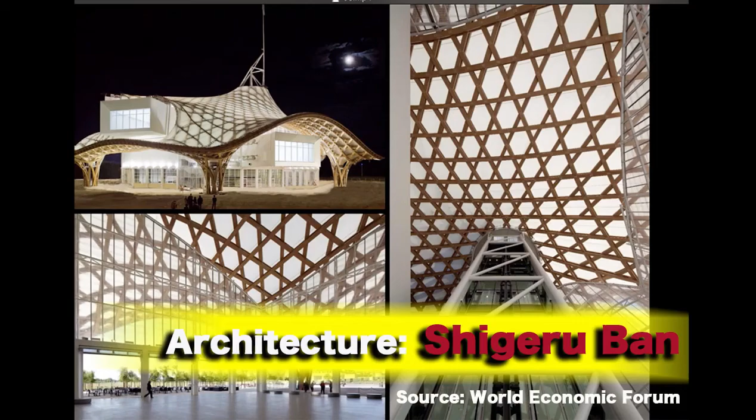It's really my pleasure and privilege to speak here and also receiving the Crystal Award last night. I was recognized not only as a normal architect, but also because I spent a lot of time doing, as introduced, disaster relief projects.

Because I was quite disappointed about my own profession as architects, because we are mainly working for privileged people. Money and power is invisible. People hire architects to visualize their power and money by huge monumental buildings. I have no objection because I love to make a monument too.

But also I thought that we should use our experience and knowledge not only for the privileged, but also the normal public, and also people who lost their houses by natural disasters. I think that we can make even temporary housing better, more comfortable, more beautiful. That's what I'm doing. And I'm trying to make a balance of working in disasters and working on some monumental projects.

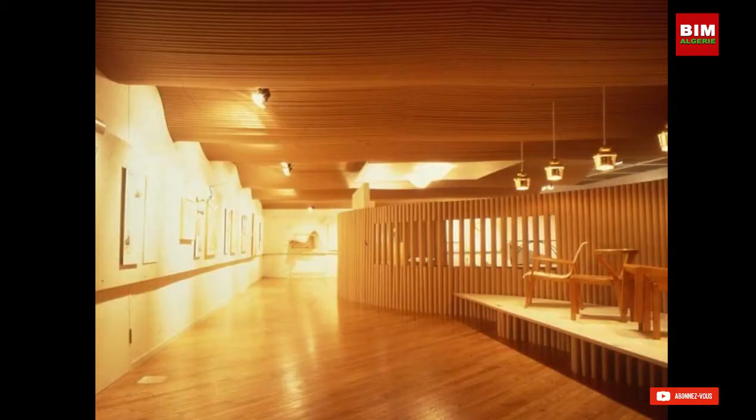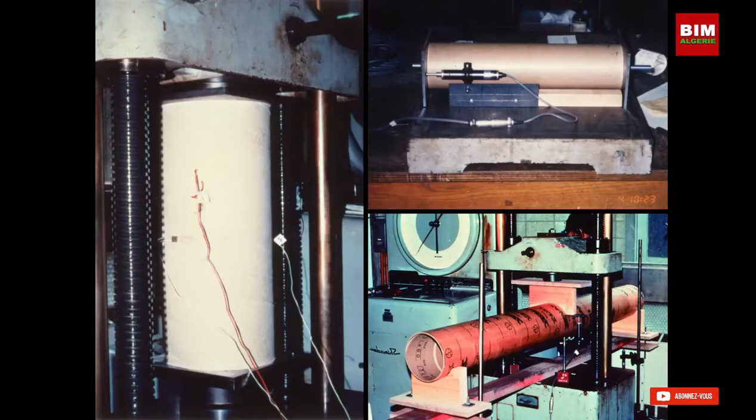This is the first project I did with the paper tube, recycled paper, 1986. Immediately after I graduated from school in New York, Cooper Union, I started my own practice without any experience as an architect. This is an exhibition for Alvar Aalto. First time I used the recycled paper because I couldn't afford using timber. In order to use it for the structure, I started testing this material. Then I designed some temporary structures.

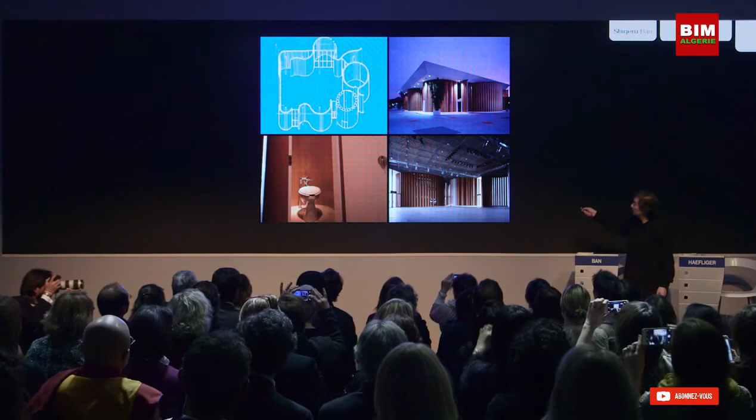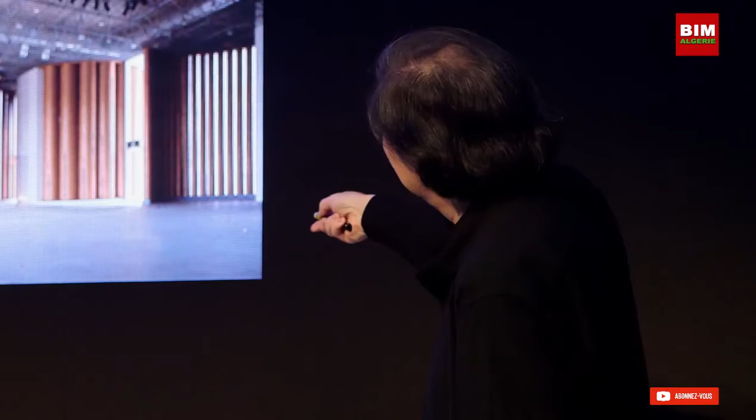This is 1990. Before people started talking about recycling, ecology, and sustainability, I started because I didn't want to waste the material. This is an exhibition for half a year. And all the building wall is made of paper tube. The diameter is 55, inside is empty, 8 meters long. Wall thickness is only 15 millimeters. There are some bigger tubes here. Diameter is 120. Inside is a toilet. In case you finish the toilet paper, you can tear it from inside the wall.

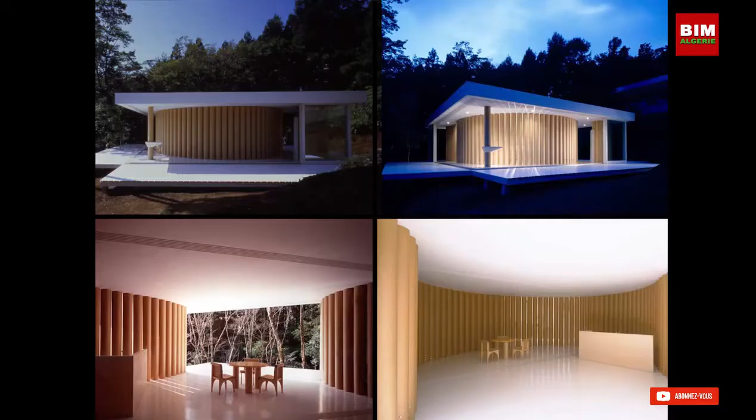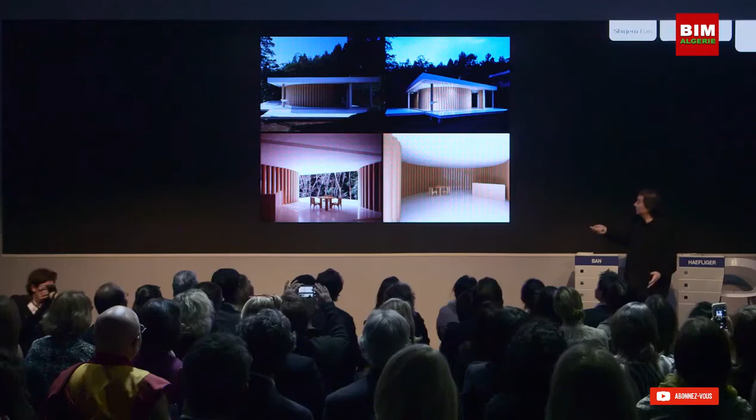And then I needed to get permanent building permission from the government. So I tested, spent a year to design my own weekend house. Although I'm not the type of person to enjoy weekends, no one hired me to design a building out of paper, so I had to do it by myself. It's the first permanent building with paper tubes with government permission. This was built over 25 years ago, but the room is still beautiful because I'm not using it. I have no weekend.

Year 2000 in Hanover, Germany, there was a World Expo. The main theme of the Expo was the environmental issue. Each country makes a lot of temporary pavilions. After half a year, we demolish them and create a lot of industrial waste. So normally the goal of design is when the building is finished. But my goal was when the building was demolished, because I wanted the material of my building to be recycled or reused after the building was demolished.

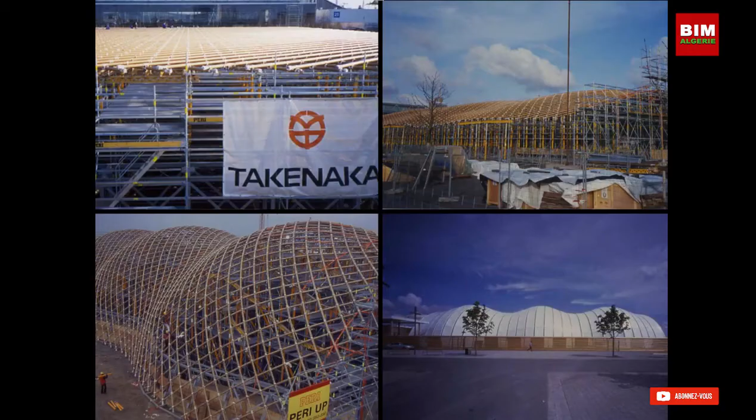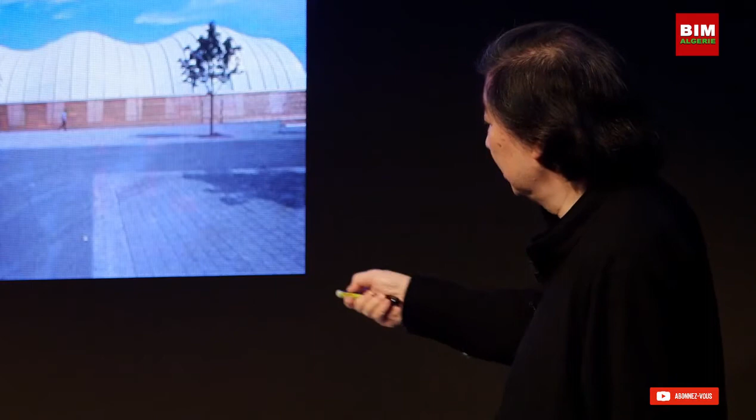So this is a paper tube produced by a German company locally, but as a part of their contract, they have to take it back after the construction is demolished, then recycle it again. That's a part of the contract we made. Even the foundation: normally we use a concrete foundation, but concrete is a rather difficult material to recycle. So I made a wooden box filled with sand instead of concrete. The connections are just fabric tape.

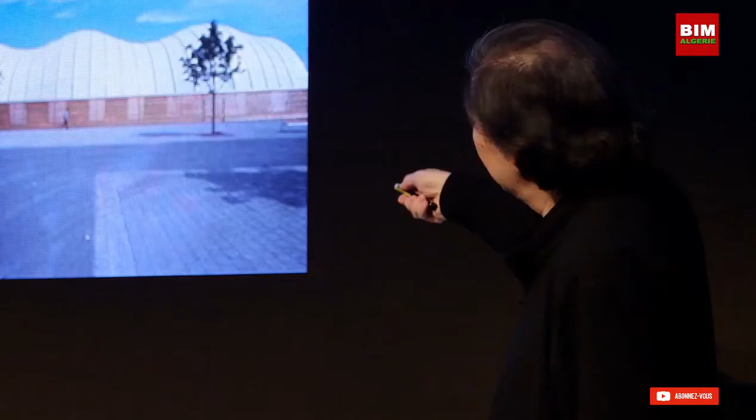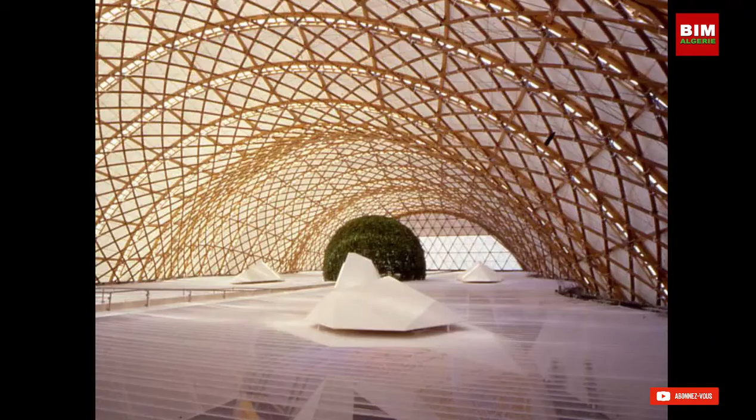Normally we use a PVC membrane, but PVC is not good for the environment. I made the roof membrane out of paper, waterproofed, fire treated according to German regulation. And this is the completion. This is a huge structure. The length is 75, the width is 35 meters. The main structure is paper tube, recycled paper.

And also I make buildings movable. This is a museum called the Nomadic Museum. This is for Canadian artist Gregory Colbert. He wanted to have his own museum over 5,000 square meters, travelling from city to city, country to country. So I decided to use shipping containers, not because shipping containers are transportable. I use shipping containers because they are an international standard. You can find the same used container anywhere in the world.

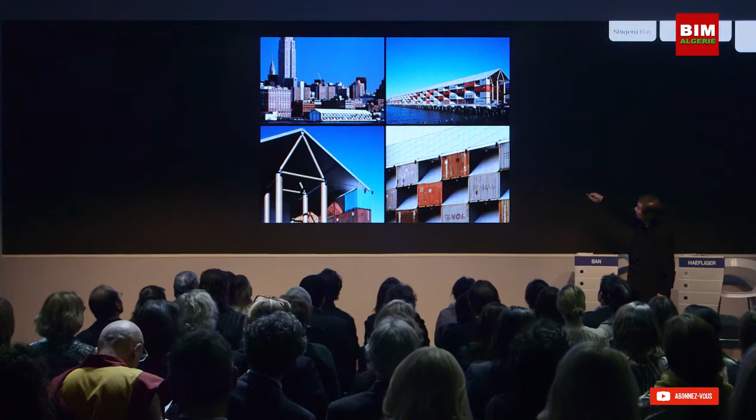So this container was just rented. This is in New York on the 14th Street Pier. We rented them for 3 months from a nearby shipyard. After the exhibition was over, we returned them to the original shipyard. Then when we moved to Los Angeles, we just rented containers from a local shipyard. This is a very old pier, with piles made of timber. Inside, paper tubes support the roof.

And this photo is one in Los Angeles, Santa Monica, because we got the parking structure. Now it's become 2 layers of 100 meters instead of 200 meters. We can even change the floor plan depending on the site conditions. As you see, the color of the containers is different from New York. This is one we rented in Los Angeles.

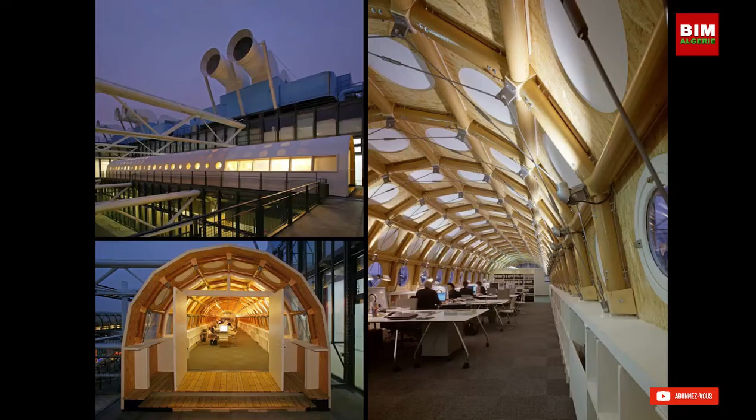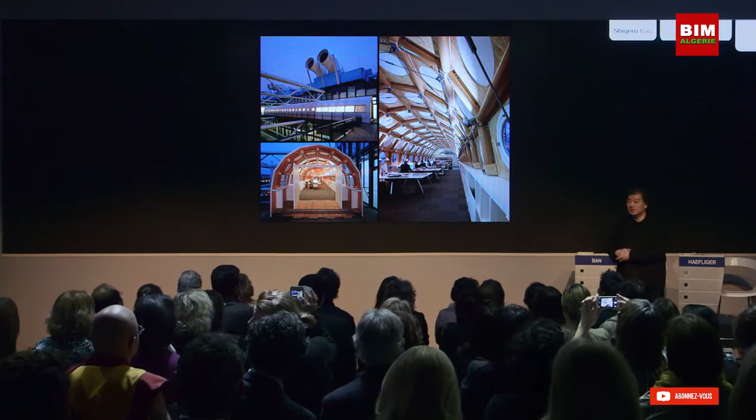This was my temporary office in Paris. When I won the competition for the new Pompidou Center in the city of Metz, I wanted to open my own office in Paris, but as you know, renting an office is very expensive in Paris. I couldn't afford it. So I asked the president of the Pompidou Center if he would lend me the terrace or a rooftop. I wanted to make my own temporary office.

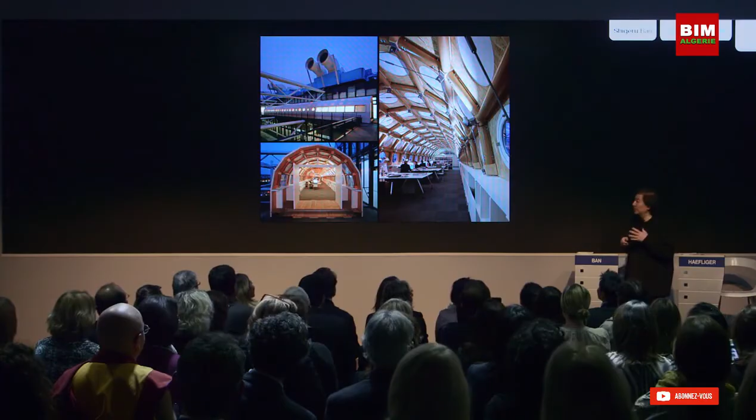So he agreed, as long as the audience of the museum can see inside my office to see what's happening in the next museum. So I was very lucky to stay there for 6 years without paying any rent, with a beautiful view. But there's one problem. When my friends came to see me, because we were part of the exhibition, they had to buy a ticket to see me. That was a real problem.

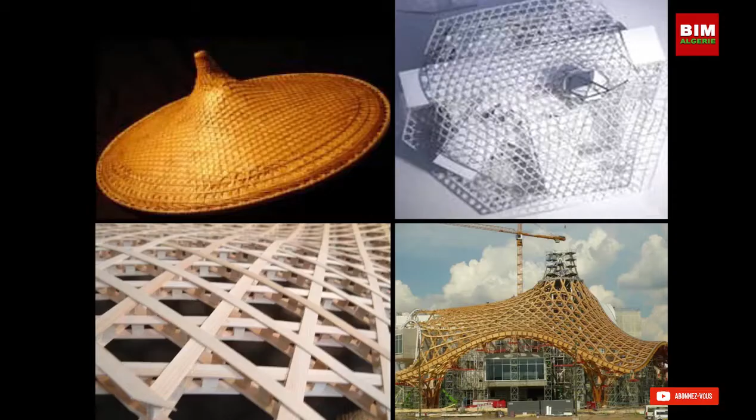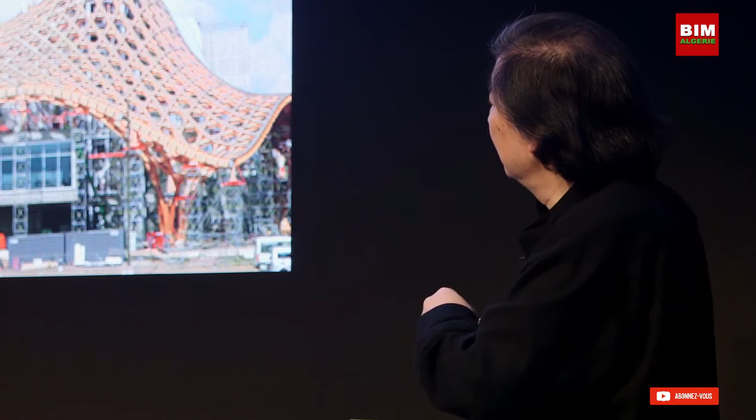And this is the construction of the new Pompidou Center in the city of Metz. The roof is made of timber structure. This is where the idea came from. This is a traditional Chinese bamboo hat. When I saw this bamboo hat, it's very architectonic. The bamboo woven, creating a hexagon pattern, and the oil paper for waterproofing, dry leaves underneath as insulation. So I wanted to make the roof like this in timber.

I made the roof hexagon shape, even each pattern is hexagon. Because if you see the map of France, the shape of the country is nearly a hexagon. So for French people, the hexagon is a national symbol. I thought in order to win the international competition, I should use the symbol of the country. But now I'm working on another project in Israel. I'm using this same pattern for a different meaning.

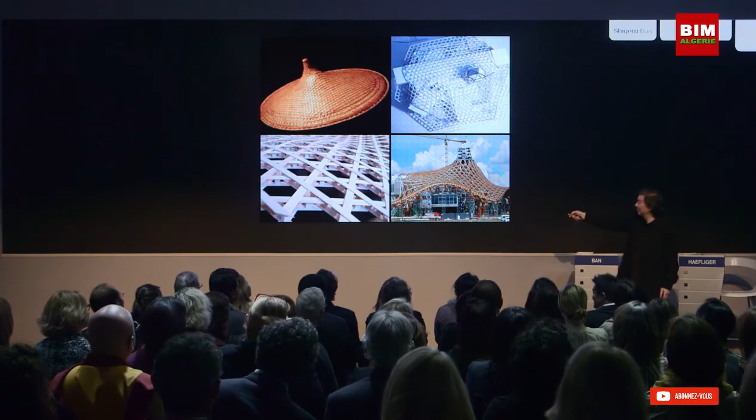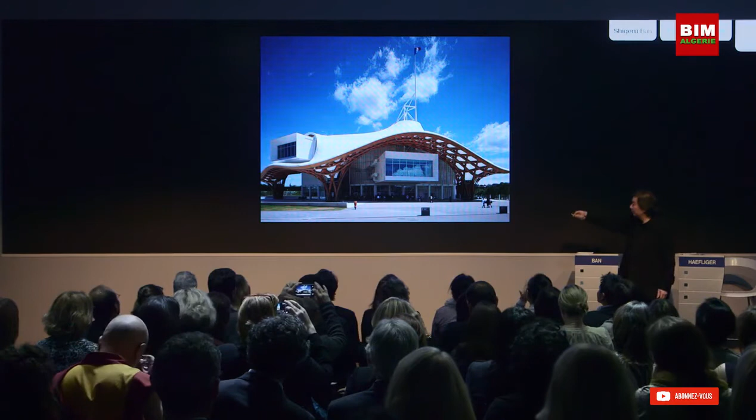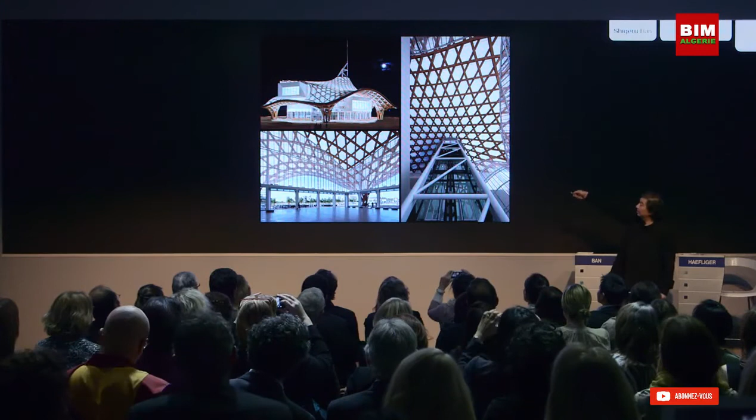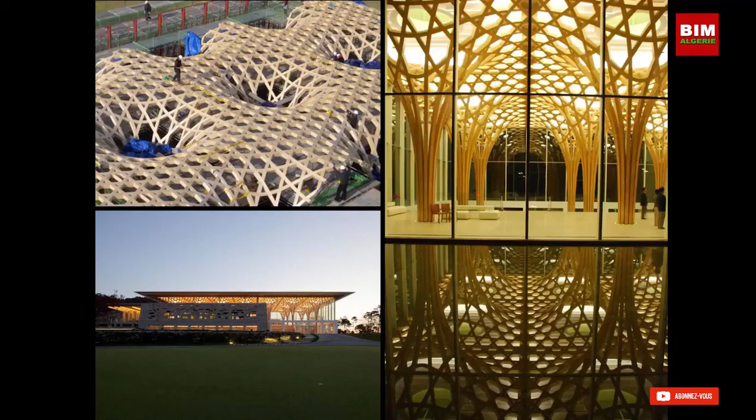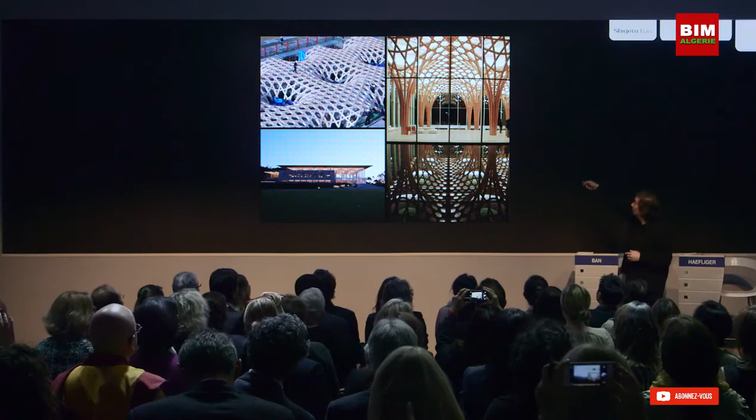I was asked to design a golf clubhouse in South Korea, but I don't play golf, so I didn't know what is inside a clubhouse. But when I was very, very small, my father used to take me to the golf range for practicing. At that time, the tee we put the ball on was made of wood. Now it's plastic. So that was my only connection to golf. So I made the tee structure in timber. So that was a very simple idea.

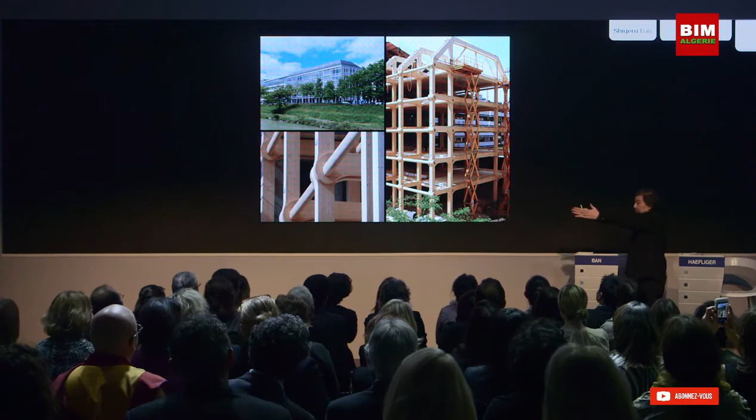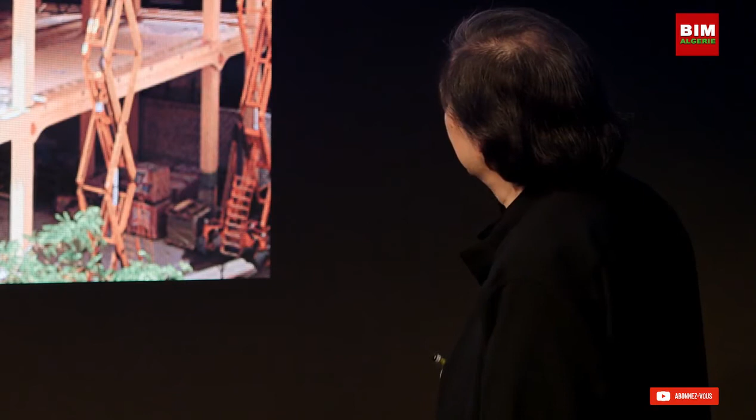This is the headquarters for Tamedia. Tamedia is a newspaper company in Zurich. And this is a 7-story timber structure in the middle of Zurich. These are the connections. I didn't want to use steel connections. I just made 2 beams on both sides of the columns, because it's oval shaped. The connection is rigid. It doesn't move under lateral force. It's a very simple construction method to make construction quicker and quieter. This is inside.

I thought we have to provide them better shelter. Otherwise, the medical care doesn't help them. So I wrote a letter to the United Nations High Commissioner for Refugees, but as usual, there's no reply. So I had to go there by myself without any appointment. And I was very lucky to meet a German architect who is responsible for shelter construction.

The United Nations started to provide them aluminum pipes, but aluminum is a very expensive material over there, so they started selling them for money and cut trees again. That's why aluminum pipe didn't work as an alternative material. So at that time I proposed to use a recycled paper tube for the structure. That is why I was hired as a consultant to develop this further.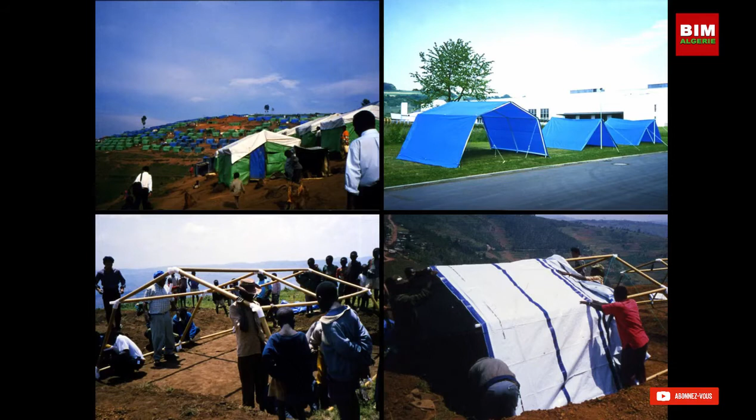This photo shows 3 different types of tent prototypes I was testing. I was very lucky to get sponsorship from one of the most famous furniture companies in Switzerland, Vitra.

A year after, 1995, in Kobe, Japan, we had this big disaster. Nearly 7,000 people were killed, and this city totally burned after the earthquake. And I knew that there were many Vietnamese former refugees gathering in this Catholic church. I thought that this minority must have a more difficult time than the normal Japanese victims. So I went there, and they were having morning service without any roof.

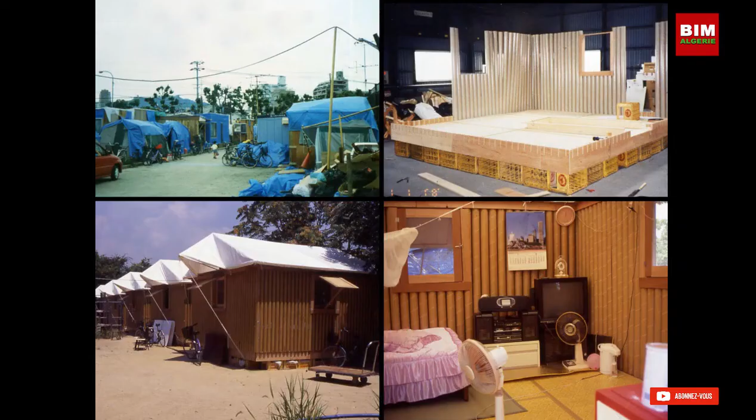So I asked the priest, why don't we rebuild the church out of paper? But he said I'm very crazy, proposing a building in paper after the fire. I didn't give up, so I commuted to Kobe. They were living in very poor conditions in the park with plastic sheets. They couldn't move into government temporary housing because the housing was built outside of the city. They are working in a particular factory, and they cannot commute from this temporary government house.

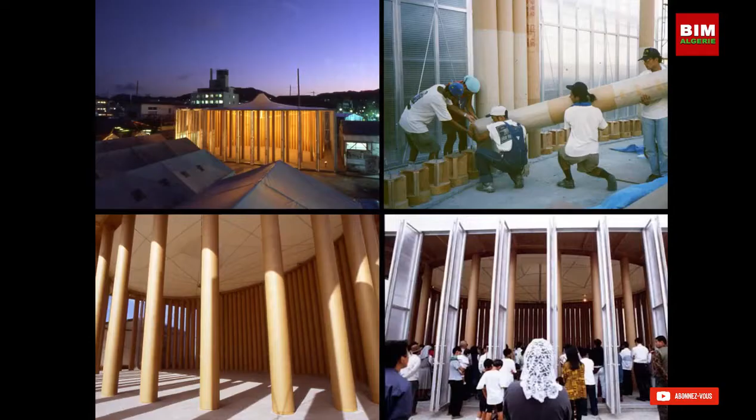Then finally, the priest accepted to build the church as long as I do fundraising and build with students. This is a very small church, 10 meters by 15 meters. Everything was built by students. This is the first time they had a morning service under the roof. The priest said that maybe they can use it only 3-4 years, but actually they used it for 10 years because they loved it. After 10 years, they decided to rebuild a bigger church, but we had a request from Taiwan.

They also had a big earthquake. They requested us to donate this church. This is it in Taiwan, in the disaster area. This became a permanent church and community center in Taiwan. Then I wonder, what is temporary? What is permanent? Even a building out of paper can be permanent as long as people love it.

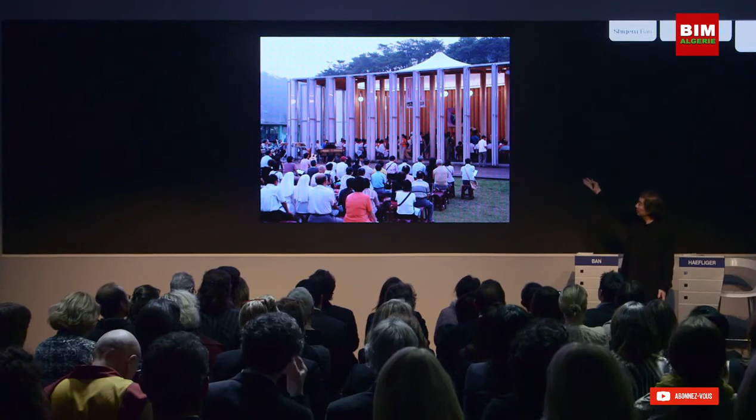Even a building made in concrete, if the building was built by a commercial developer to make money, can be very temporary, because another developer buys the land, destroys the building, and puts a new one. So even a concrete building can be very temporary if it is built to make money. But even such an inexpensive building made in paper by students can be permanent if people love it.

And in 2008 in China, in Chengdu, they had a big earthquake. Over 25,000 people were killed. Also many of the school buildings were destroyed, and many children died. I started building temporary housing, but the local government doesn't want a foreigner to make local housing. Instead, I was asked to build a temporary school.

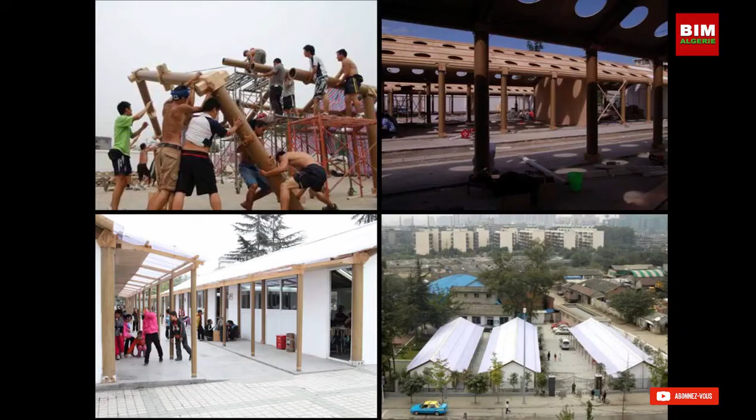So I brought my Japanese students to work with local Chinese students for 5 weeks, totally by students. We made 3 buildings, over 9 classrooms, over 500 square meters, using local paper tubes and wooden joints. Everything was made by students.

In 2009 in Italy, L'Aquila, near Rome, the old city was totally destroyed by an earthquake. One of the issues was they have their own Philharmonic Orchestra and School of Music, but all the concert halls were destroyed. I proposed to the mayor, why don't we rebuild the concert hall, because the musicians were leaving the city. And he said, I'm going to give you the land free, but you have to do fundraising by yourself. I was very lucky; I got a phone call from the Japanese embassy in Rome, and they'd like to help my fundraising.

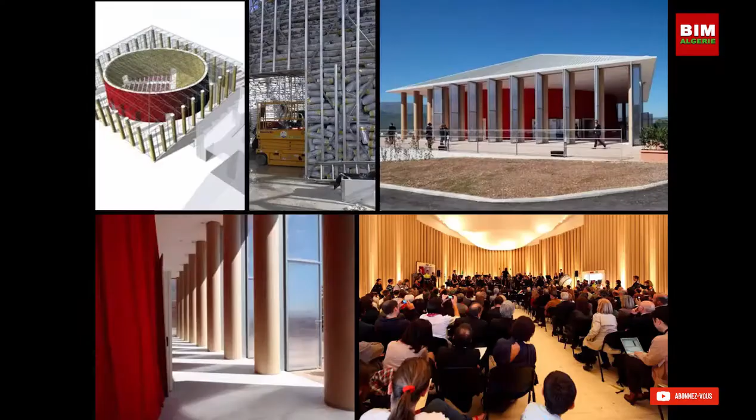This is construction. In order to have a very good acoustical wall, I didn't want to use concrete because it's too expensive, and also as a temporary structure, it's too heavy.

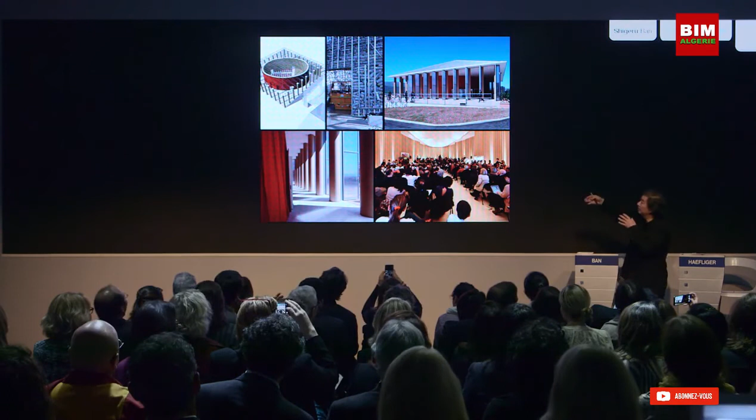So the wall is made of metal cladding, the scaffolding filled with sandbags. This is the inside. This is the opening concert. Paper tube was used as an acoustical material, not as a structure.

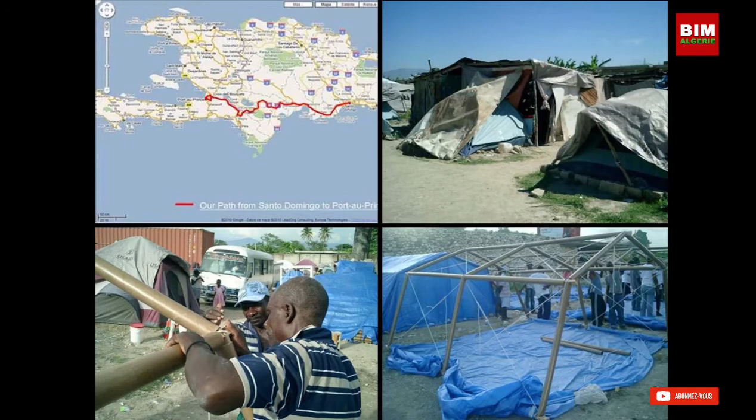2010 in Haiti. Left side is Haiti, right hand side is the Dominican Republic. Because in Port-au-Prince, the capital of Haiti, the airport and the port were totally closed, I had to fly to Santo Domingo, capital of the Dominican Republic, and drive over 7 hours to the capital.

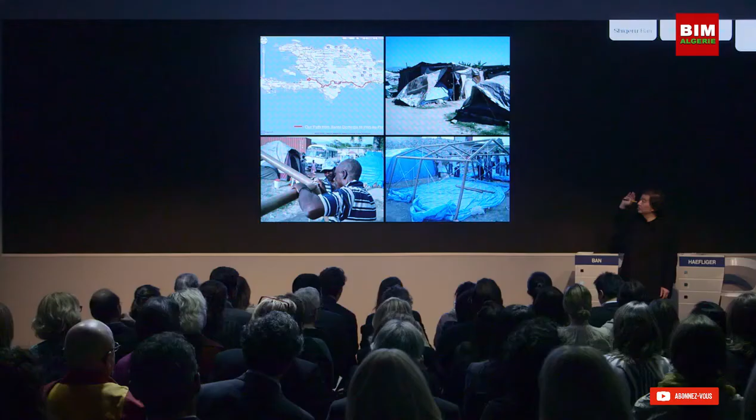No material was available in Haiti and no volunteer people. So we made a team in Santo Domingo, prepared all the material with paper tubes. We went there with the material by truck to put them up, and also we trained local people to build shelter by themselves.

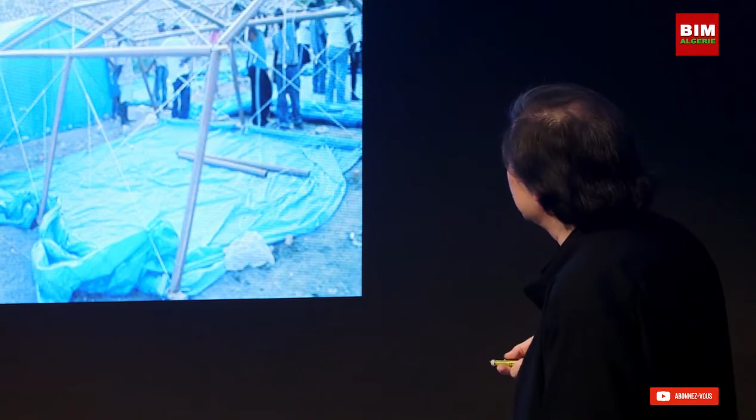Then 2011, in Japan, north side of Japan, we had a big earthquake, tsunami, and nuclear problem. This is a typical evacuation facility. It's a gymnasium. They have to stay there until the temporary house is built, but there's no privacy. So they have to suffer the situation. There's no privacy between families. But privacy is a very important condition for the people.

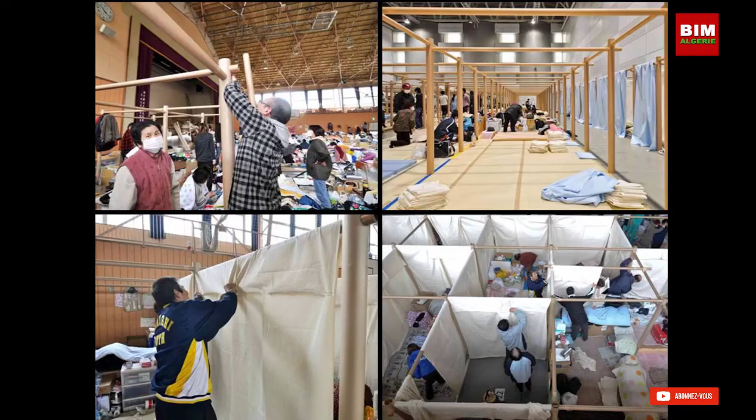So I went there to make partitions. It's a partition made of paper tube with a fabric curtain. The authority didn't allow us to make a permanent partition, so this is something they accepted, something flexible to open and close, but everything can be easily made by volunteer people. So this is just 2 hours. And over 50 facilities all over the damaged area. We built 1,800 units with volunteer people all over the Tohoku area.

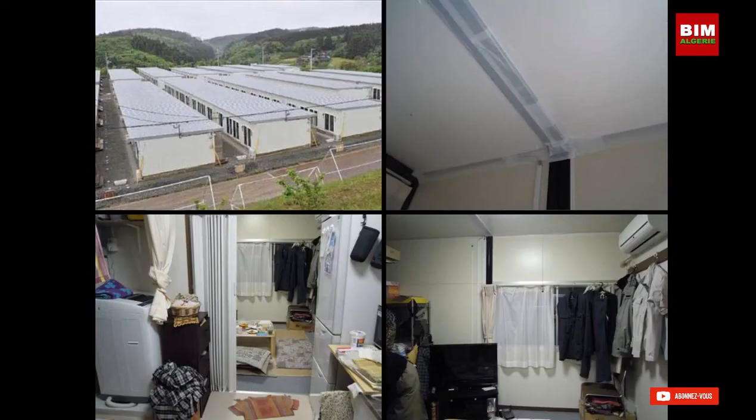Then, unfortunately, they have to move into such poor construction housing made by the government. It's so close to each other, you cannot open the window. Inside, there's no storage, it's so messy, leaking, no insulation. You suffer the noise from the neighbors. It's a terrible condition. They never try to make anything comfortable.

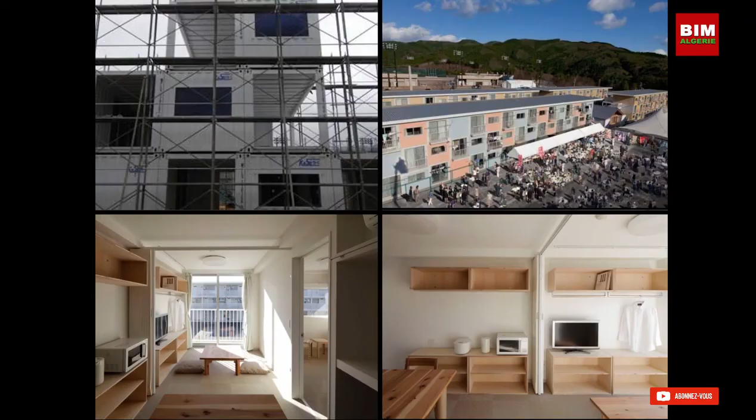But I thought also that the important thing is that on the over 500 kilometer coastline which was damaged, there is not enough flat area to build standard single-story housing. I proposed to make 3-story housing with shipping containers. One of the towns, Onagawa, in Miyagi Prefecture, had only one baseball ground, and they had to build 190 units, but it's too small for standard government housing. They accepted my proposal to make, for the first time in Japan, multi-story temporary housing.

Inside is like this. It's the same size as what the government made, same budget, but still we can make something more comfortable and better. And the residents here, they just don't want to move out.

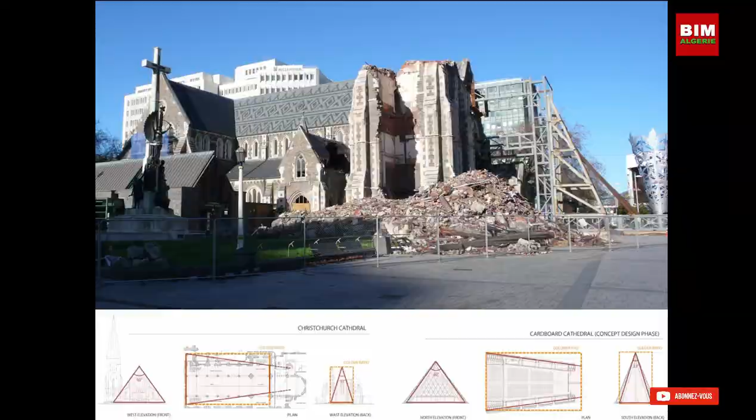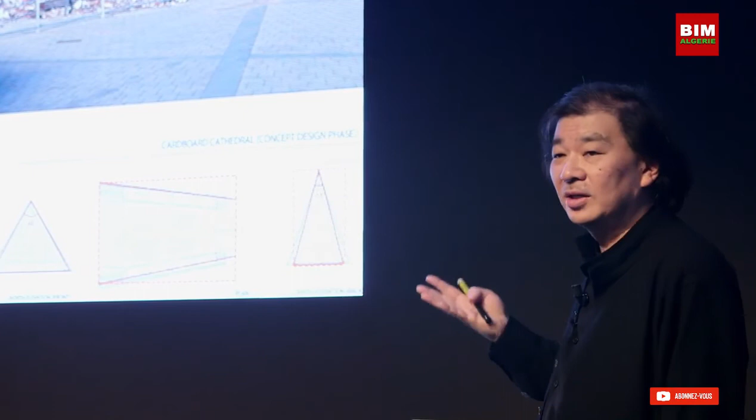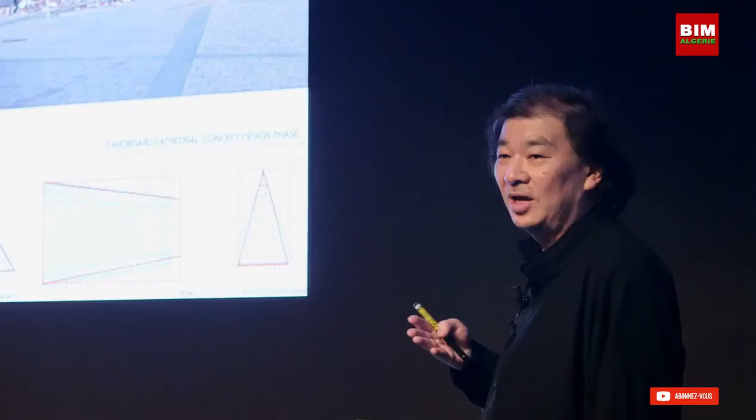17 days before the earthquake in Japan, a big earthquake hit Christchurch in New Zealand. This is the most important Anglican cathedral, which was totally destroyed. I got an email from the bishop. He asked me my design fee to make a temporary cathedral. I said, if the temporary cathedral is used not only for religious services, but also for community services, I work free as usual. I was asked to come immediately, so every week I commuted between New Zealand and northern Japan.

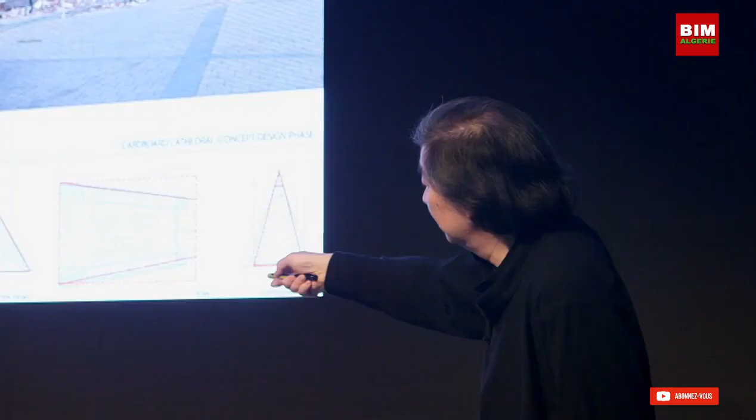I respected the original design of the cathedral, using its geometry in my new proposal. This is completion, made locally in Christchurch. However, the local factory in Christchurch was too small to make the paper tube required for the structure. But I didn't want to import from either Australia or Japan. I wanted to use local material with local people. Making the structure out of cardboard is not important for me, so I put timber inside the cardboard tubes to reinforce them, using local material.

I told her, in Japanese, paper, which is called kami, also means God. Making the cross out of paper also means God. So it's very good. So then she was convinced. Now she's very happy to have a cross out of paper. I'm not making a monument, but this became a kind of symbol, and many tourists are coming back to Christchurch. So I'd like to continue building buildings to be loved by people.